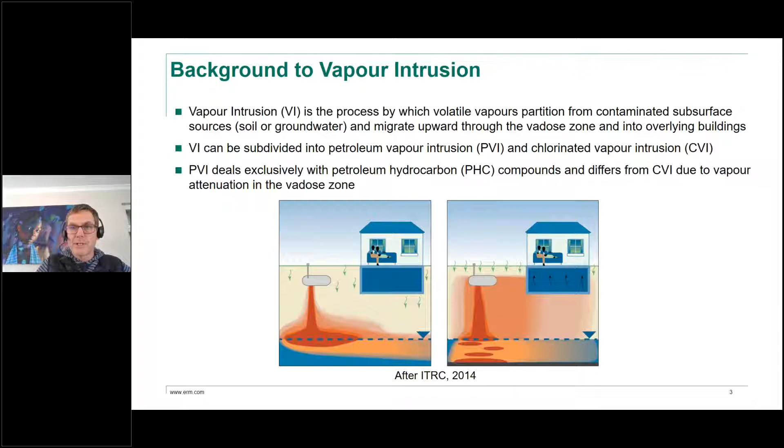Broadly speaking, vapor intrusion is subdivided into petroleum vapor intrusion, or PVI, and chlorinated vapor intrusion. The reason for that is that the attenuation of vapors in the presence of oxygen is a key process for petroleum compounds, and it's not a process typically seen with chlorinated solvent compounds, which biodegrade anaerobically. So there's a distinction between some of the processes in petroleum VI and some of the processes in chlorinated VI, or CVI.

In terms of guidance available internationally, there are some key documents which I've put up on this screen. Mostly the understanding of VI is led by the Interstate Technology and Regulatory Council, or the ITRC, in America, and also the US EPA. They produced guidance documents in the early 2010s, so 2014 and 2015, and the best practice understanding of VI is captured in those documents. Also, CRC Care, an Australian organization, published their guidance document on VI in 2013. In fact, in the early 2010s, when this was quite a hot topic, there was a bit of a power play between these organizations to see who could get their guidance out first, and the Australians actually got theirs out in 2013.

But they essentially cover similar things; the methodology and approach to VI is not very different between these documents and organizations. In fact, many of the people who have worked on these, whether in EPA, ITRC or CRC Care, have consulted with one another, and they work quite closely together anyway. So it is consistent. It's not as though you would open one of these guidance documents and see something very different to the others.

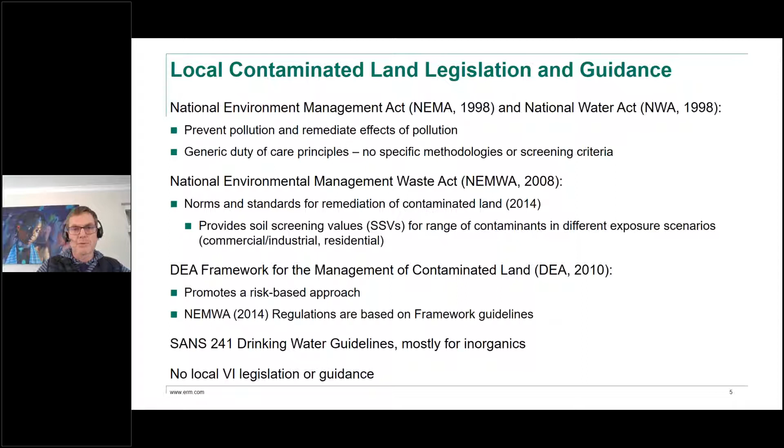In South Africa, there's also drinking water guidelines, SANS 241, which are essentially based on the WHO guidelines. And also, which I haven't listed here, there are occupational health screening criteria for air contaminants, but those are not risk-based screening levels. They're more industrially based screening criteria, and so there's no actual vapor intrusion legislation or guidance in South Africa. So what we do need to do is follow the principles of using the risk-based approach put forward in the framework, and also use the best practice guidance documents, which I've just shown you, from ITRC and US EPA and so on.

So some of the challenges we have in this country: vapor intrusion does remain largely unassessed because there's no legislative drivers for doing these investigations, and no currently available guidelines. VI does actually represent one of the most significant exposure risks to VOCs in the environment, because very often, especially at industrial sites, people don't typically drink the groundwater, and they're not necessarily in contact with the soil either. So what you're left with is the potential for a vapor intrusion risk to the buildings that you're working in or occupying. So as I said, South Africa does have a risk-based framework, and that can be used as a basis for developing VI guidance.

There's limited availability of sampling equipment for capturing vapor samples and also for analyzing them in South Africa. So there's limitations there. Mostly we have to submit our samples to international laboratories to get them analyzed. And then we use international guidance in terms of the methods of sampling and screening of risks. So due to these logistics and foreign exchange considerations, the costs of these assessments go up relative to the cost of, say, a simple soil or groundwater assessment, and for that reason it's more expensive to do this in South Africa, and that might be why there's less of these assessments.

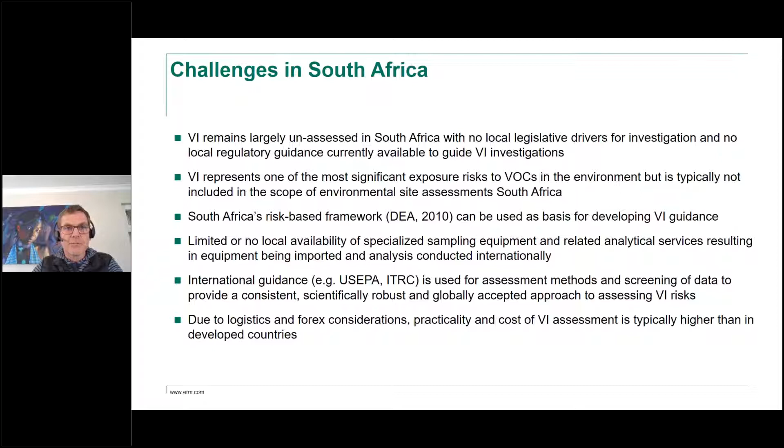So in terms of sampling methods, broadly speaking, vapor sampling can be classified into two categories, either active sampling or passive sampling. So active sampling refers to extracting a sample of vapor of a known volume, and that will give you a quantitative result of how much of a contaminant per meter cubed of air you would have within your building or in your outdoor environment, wherever you've taken your sample.

So there's an image on the top right which shows you schematically how that setup would be. You'd have something like a Summa canister, which is a vacuum canister that you collect your sample in, and you'd have a sample train attached to a pin or a vapor well, which is going into the ground and collecting your sample from the subsurface. You can also obviously collect ambient air samples simply using the vacuum Summa canister in an indoor environment.

It also shows you in that figure how helium is used in a shroud to determine potential leaks in your vapor sampling setup. Then in terms of passive sampling, it is essentially where you would leave a sampling device. It's normally an adsorbent sampler of some nature, which you put into the ground and you leave there for a period of time. It could be a week or 2 weeks. And you come back and retrieve that sampler and analyze that for your volatile contaminants of concern.

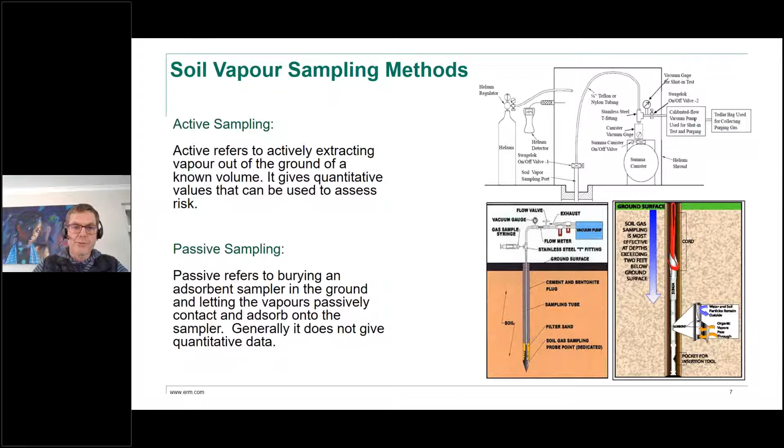And that would give you a qualitative idea of how much contaminant is there. It's not going to be mass per volume, but it is going to give you a broad understanding of where your hotspots are on your site or where your source areas are. And it is a cheaper method, and often the way passive sampling is used is on a grid basis where you know very little about your site or about your contaminants at your site. And if you're trying to understand where the source areas are, it's often useful to start with a passive sampling event and then move over to an active sampling.

So these are just illustrations of what it would look like. On the left-hand side, we've got what we would call a vapor well, which is installed very similarly to a groundwater monitoring well. You'll have your probe with apertures in it to allow the vapor in, and that would be surrounded by a clean silica gravel pack, same as a groundwater monitoring well. That will be attached to a nylon tube or some sort of a tube where your sample can be collected to the surface, and you seal that with bentonite.

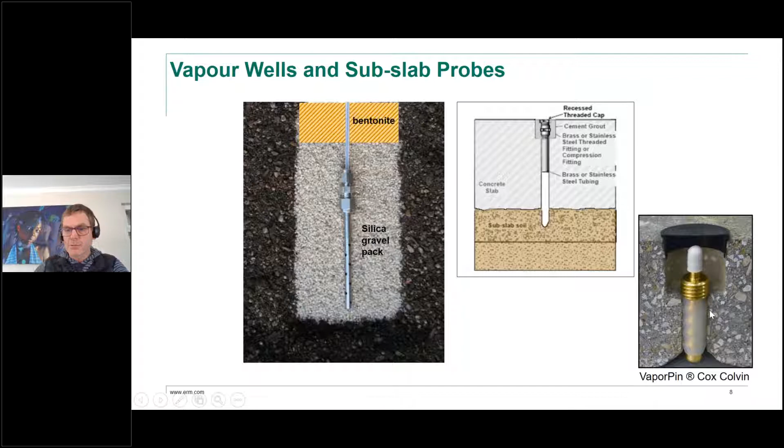The middle picture shows you a picture of a vapor pin, which you would install through a slab of a building or outside on a concrete slab just to the subsurface environment, and that allows you to collect a sub-slab sample from beneath your floor slab. And then the picture on the bottom right is just a proprietary product called a Cox-Colvin vapor pin, and that's very similar to the other vapor pin example, but it's where you wouldn't have to use grout to grout the pin in place. It would have some sort of a silicone seal, which allows you to seal it off from the subsurface. So those can also be used, and there are similar devices to that as well.

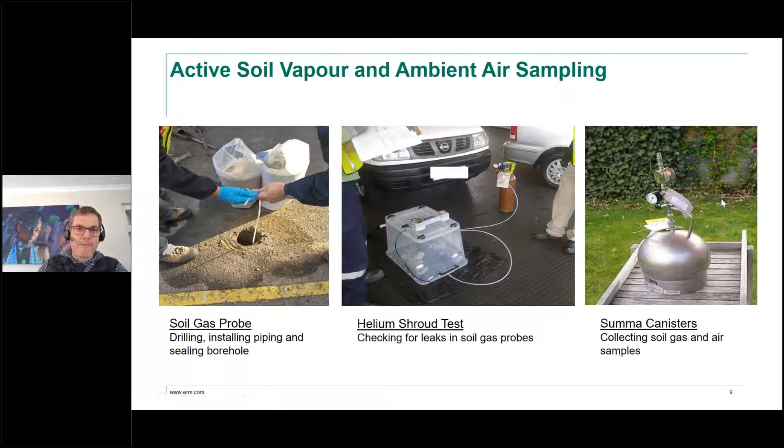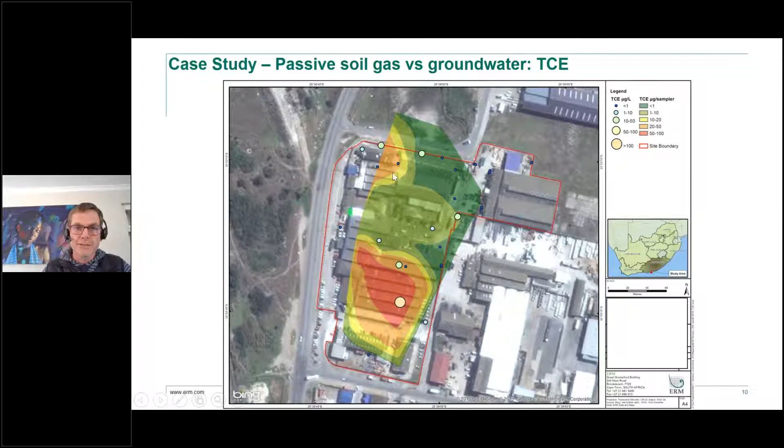In this case, the contaminant was TCE, or trichloroethylene, at this particular site, and you can see the color flood shows you the areas where the higher concentrations of TCE are present in red, and the lower concentrations in green. And then overlaying onto that are the groundwater well positions at that site which were installed, and you can see that the higher concentrations of TCE in groundwater roughly correspond with the areas at the site, particularly down here in the south, where we picked up the high concentrations in the soil vapor. So it shows how you can identify particular source areas at your site by doing the passive soil gas survey.

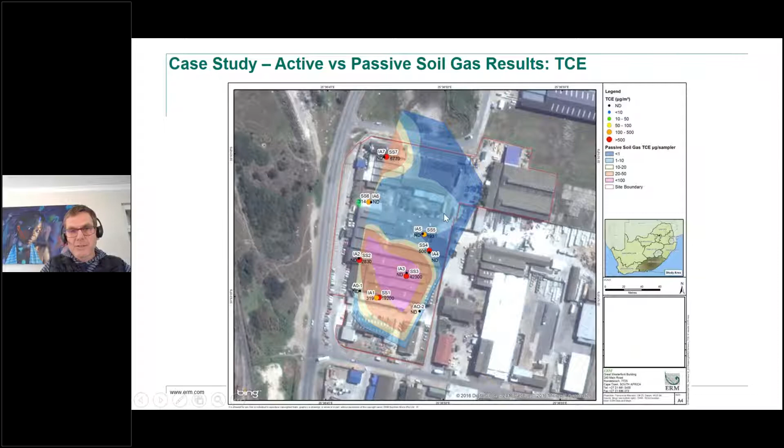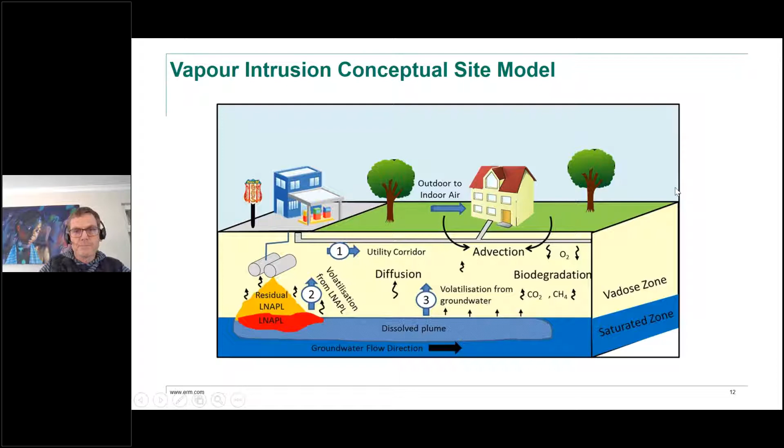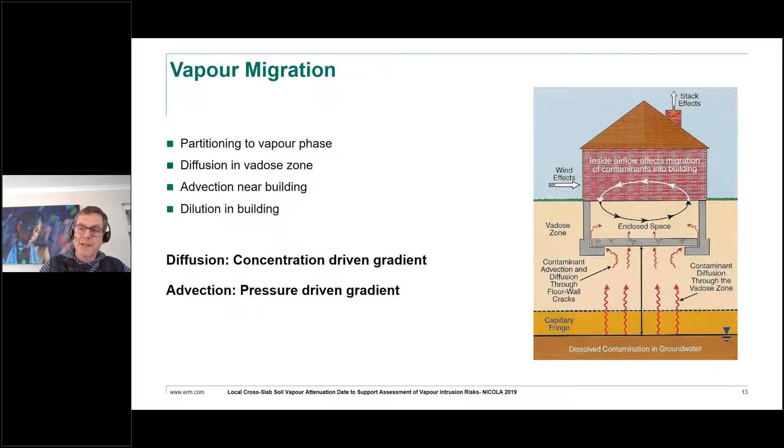So if you've got your groundwater plume, the vapors will move upwards away from the high concentration of the groundwater. Whereas advection is a pressure-driven gradient. So either you will have a greater pressure inside the building, and that will discourage or cause vapors to move outwards and not into the building. Or if you have a more negatively pressurized building on the inside, then that would encourage vapors inwards. So that we'll discuss in a minute as a way to mitigate against VI.

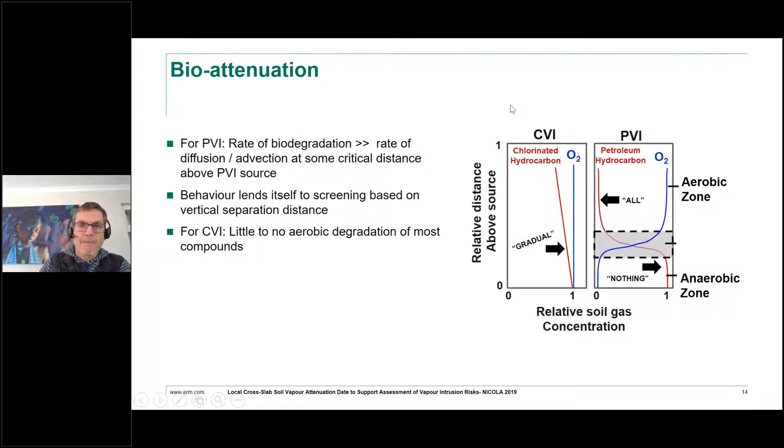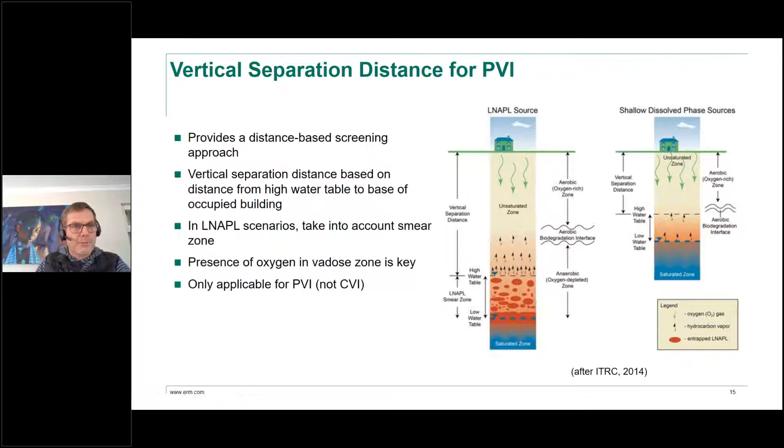If you're looking at a dissolved phase plume, like the diagram on the right-hand side, it would be the position where you've got the highest water table to the building slab of the building. And as I said before, the presence of oxygen diffusing down into the soil is a key process, and there'll be a narrow reaction zone at some point where the petroleum compounds would degrade effectively before reaching the building.

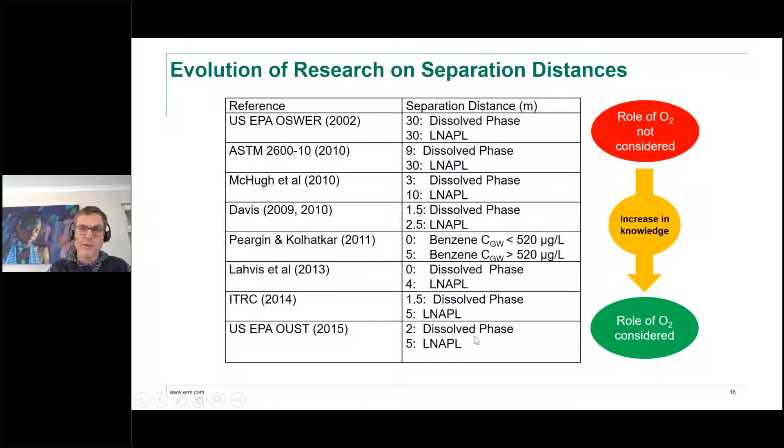And as that research progressed and oxygen was better understood, you can see that what these various authors have proposed is much smaller separation distances, in some cases 0 for lower concentrations of contaminants, to what is broadly understood now in terms of the guidance. These are the guidance documents that we're following at the moment, and they're proposing separation distances of between 2 and 5 meters, depending on whether you have dissolved phase or LNAPL.

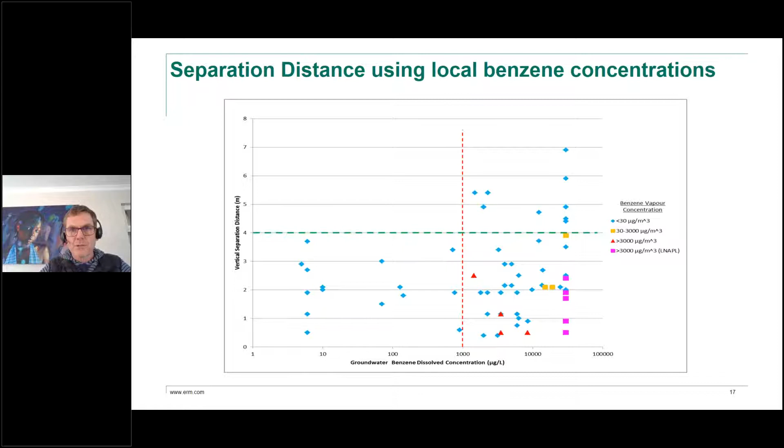So that's very useful that we were able to collect local data which actually corresponds very closely to what other authors and the EPA and the ITRC have seen, which goes to show that the situation in South Africa is very similar to what others are finding elsewhere.

So then, just touching on modeling, you can also model vapor intrusion. There are various models available, and some of these models have been available for a long time, like the Johnson-Ettinger model. That model does have limitations in terms of considering biodegradation of petroleum compounds. So it is a conservative model. If you're running a Johnson-Ettinger model, you must be aware that the concentrations that they may predict from a contaminant source, let's say groundwater to indoor air, would probably be higher than what they will be in reality.

Other more recent models that are available are BioVapor, and PVI Screen is an even more recent model, which is a variant of BioVapor, and those models do take into account biodegradation, so they'll give you a slightly more accurate result.

But what we typically say is that collection of site data would be preferred over modeling, as a minimum to try and collect sub-slab data, which would have less variation. It will have some seasonal variation, and you do need to collect multiple data points rather than just one, to try and see whether you in fact do have a risk or not.

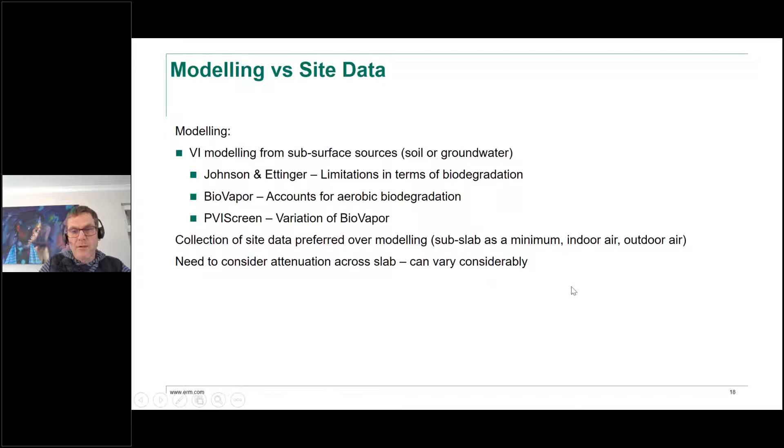I think where models can be useful is where they predict no risk to indoor air, because the models are typically set up conservatively, and provided that you're using appropriate input data, if you're running a model and it predicts no risk, then the likelihood is that there won't be a risk, because, as I say, they typically use conservative inputs. And then you also need to consider the attenuation that will occur across a foundation slab, and whether or not these vapors can get across the slab or through the cracks or diffusing.

Okay, so looking at attenuation factors across slabs, this is just some information that comes from the US, where they've done a lot of research on this. Various states in the US have proposed attenuation factors, so that's the concentration in the subslab versus what it would be in indoor air, and how much attenuation is likely to take place. And that varies from about 10 times attenuation to 1,000 times attenuation, depending on which state you're talking about. The US EPA has suggested an attenuation factor of 0.03, which is 30 times attenuation from subslab data to indoor air.

And these attenuation factors have been derived using an extensive database of information, which I will also show you shortly. And typically the way it's done is to use paired indoor air data and subslab data from the same location, and then to compare those two. And the 95th percentile is used to derive the attenuation factor.

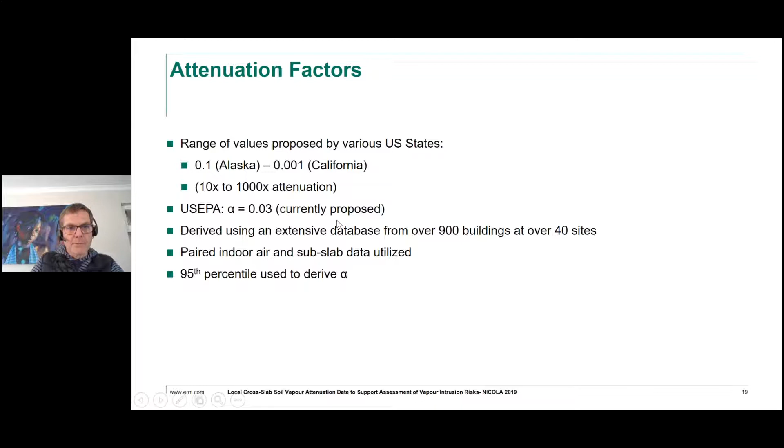So the attenuation factor, as I've just said, is the concentration of the indoor air divided by the concentration of the soil gas. And that would give you, for example, what we saw here, the 0.03, as being the likely attenuation on average.

So if you know what an allowable indoor air value is, or a screening value for what's allowable in breathing air, then you can estimate what the concentration of soil gas could be that would pose a risk. So your indoor air divided by your attenuation factor will give you the acceptable concentration of soil gas. And if you know the soil gas concentration, then you can obviously also change the equation around and work out what the indoor air concentration would be.

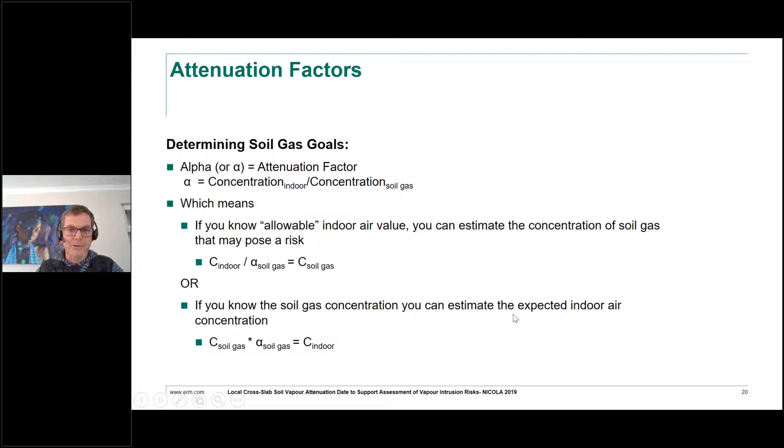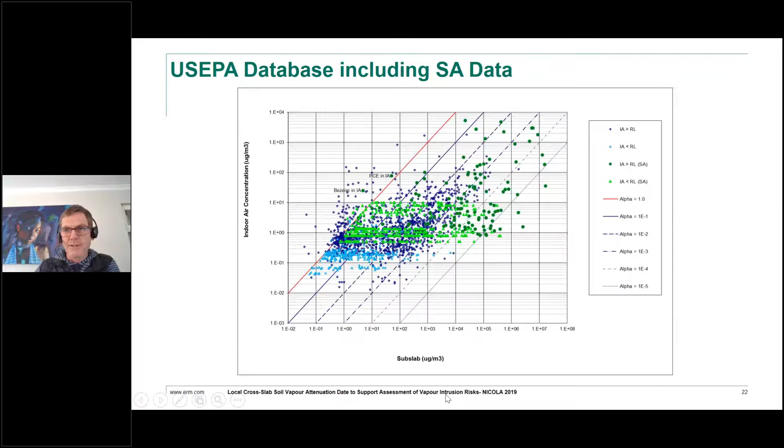And what you can see from this data is that in fact, we only found 2 data points where the indoor air concentration was greater than the sub-slab concentration. And in both of those cases, it was in fact confirmed that there was an indoor air source. In the one case, it was benzene. There was benzene in indoor air. And in the other case, there was PCE in indoor air. So that's where the PCE concentration was greater than the sub-slab concentration.

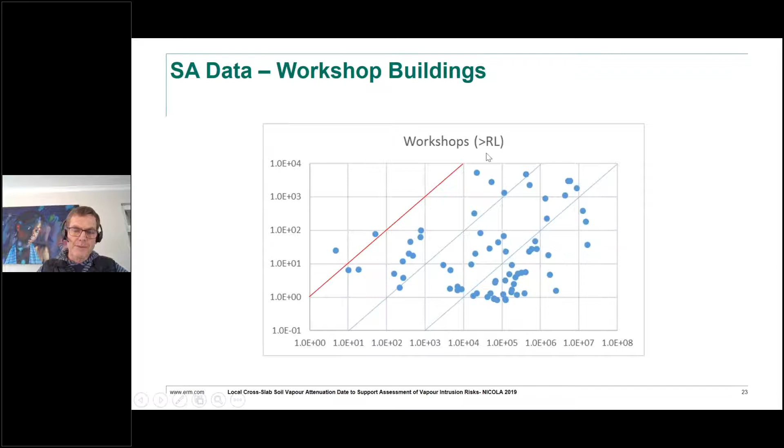And then just breaking that up further. Steve, sorry to interrupt, just to give you a time check, we've got 15 minutes left and we will need to have some time for questions. So just to let you know. Yes, I'll be wrapping up shortly.

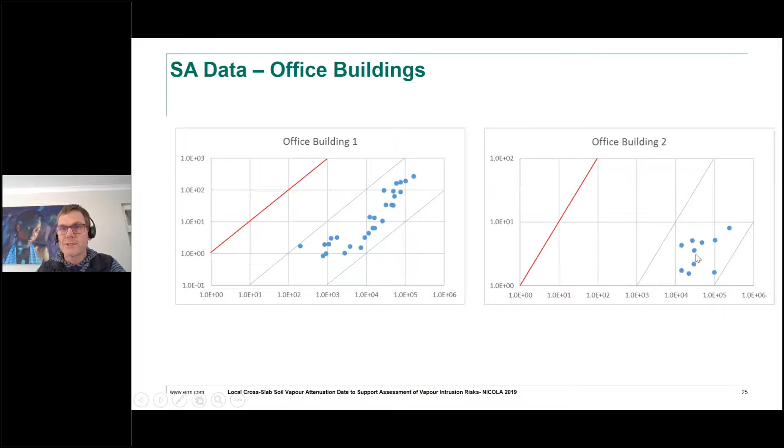Thanks, Marge. So just breaking this up into different office buildings, you can see that it becomes even narrower. And I think the important message here is that if you understand your building well, and if you have enough data points, you could actually develop an attenuation factor that was specific to your building. So here you can see that for this particular building, there's a very narrow range of data points, and you could probably safely calculate an attenuation factor for that particular building. And the same goes for this second building, where all of the data plots at more than 1,000 times attenuation from the slab to the indoor building.

Then looking briefly at vapor mitigation methods, there's various different ways that one can mitigate against VI. If there is VI coming into a building, there's vapor barriers, there's spray-on barriers, there's geomembrane barriers that can be applied to buildings generally when they are under construction. You can also look at changing the air conditioning systems or ventilation to a building to try and change where the vapors come in. And then another useful method is depressurization of the floor slabs, and we'll go into that in a little bit more detail on the next slide, to prevent vapors from coming into a building.

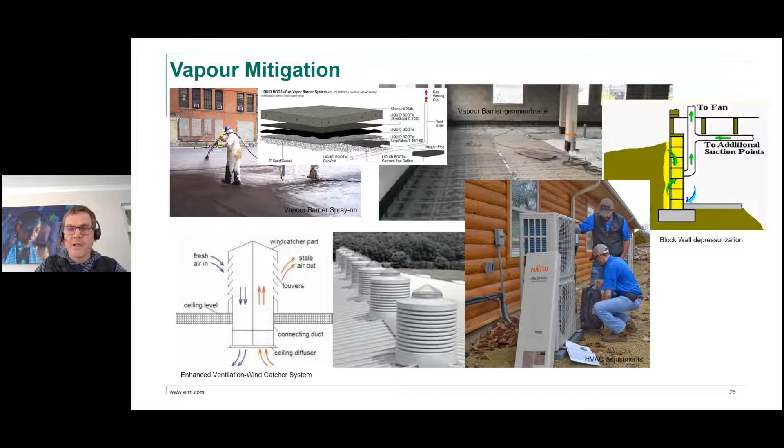So sub-slab depressurization is the system that we've applied to various buildings in this country very effectively. And it's a simple process of using an extractor fan. There's a picture of the extractor fan on the right, connected to a sump beneath the building, and you effectively create a vacuum in the sump, and basically you're negatively pressurizing the sub-slab environment or the outdoor environment relative to the indoor environment. So you're basically creating an advective flow away from the building rather than into the building. So it's a very simple method of, this is showing you the sump through the floor, encouraging vapors to move away from the building and not to move into the building.

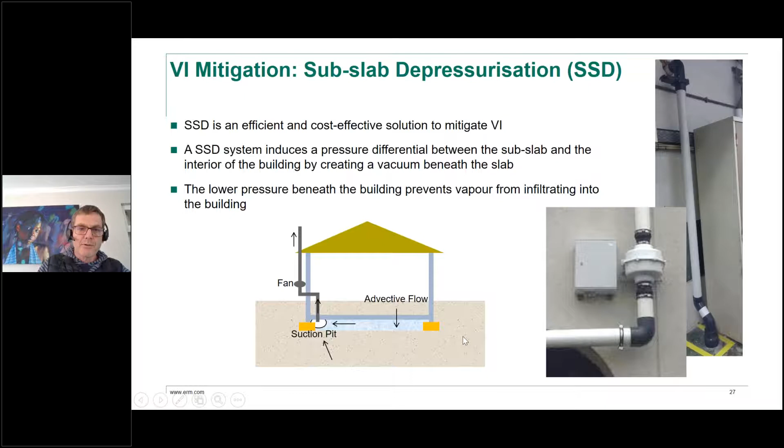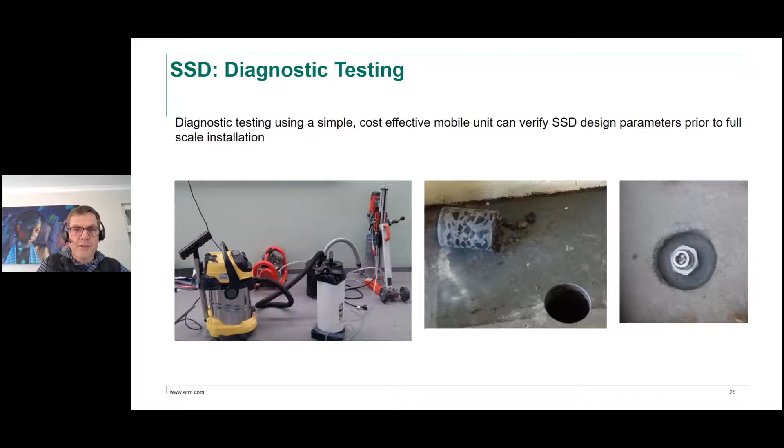And with this, we do what we call diagnostic testing. So while you're constructing these SSD systems, you can connect an industrial vacuum cleaner to your sump, and you can apply a vacuum to that and then take pressure readings at points a set distance away, and you can work out what your radius of influence is before you in fact install the system. So you can understand how many sumps you might need in a building to make it effectively cover the whole building slab. And so this photo shows you exactly that.

This is a building footprint where we installed 2 sumps, and using the diagnostic testing method at various distances away from these sumps, we could work out that it was exerting an effective pressure which was sufficient. It needs to be at least 1 Pascal of pressure, and it was sufficient at all of these points to fully cover the footprint of the entire building using these 2 sumps and the extractor fans on the outside of the building.

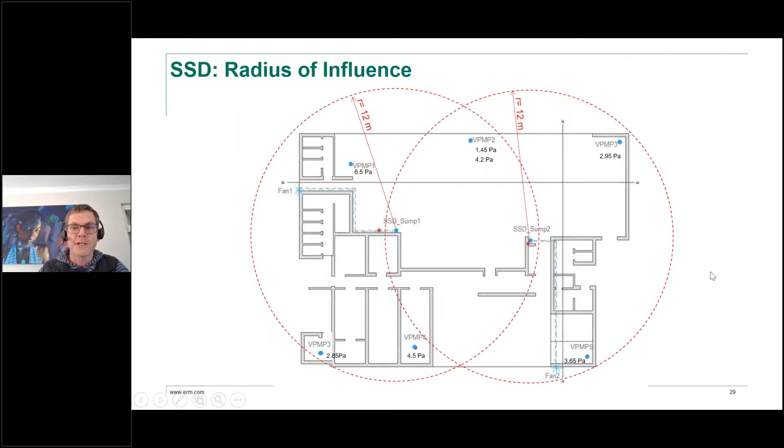So then just moving on to our position paper, and I'm nearly done now. It focused on the management of VI related issues, and drawing on the guidance from EPA and ITRC, provides a brief background, and it promotes a sustainable risk-based approach, which is in line with our legislation. And our position is effectively to develop your conceptual site model, evaluate your risks using the standard risk-based approach, and where unacceptable risks are identified, to develop an appropriate sustainable risk mitigation. And in the position paper, we've also included the important reference documents.

Then looking at the technical guidance document, which is still under development, this is intended as a practical guide to the management of risks from VI, and it's being prepared in accordance with the international literature, which I've spoken to you about. The important aspect here is that it's not intended to introduce new scientific concepts. We aren't doing our own specific research apart from collecting data which corroborates the data that we are seeing from other areas. But it's using the guidance that's out there and putting it into a usable format, focusing on the issues that are specific to us in South Africa. So it's aimed at us environmental practitioners, owners of contaminated sites, and also regulators.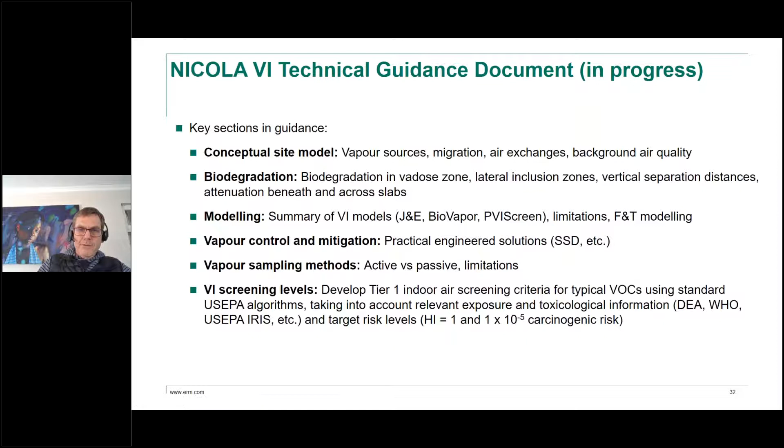Thanks very much, Steve. That's great.

I got a quick question. The guidance document you're talking about, is it specifically PVI or is it VI in general, including both types? We did think about that, and there was a school of thought that we should focus firstly on PVI and then get to the CVI. But the feeling was that if we end up producing a document on the one and not covering the other, we might never get to it.

So I think the intention is that it will cover vapor intrusion as a whole, but obviously the aspects that are specifically related to PVI will be covered and will be addressed. So it's going to cover both. It's going to be VI as a whole.